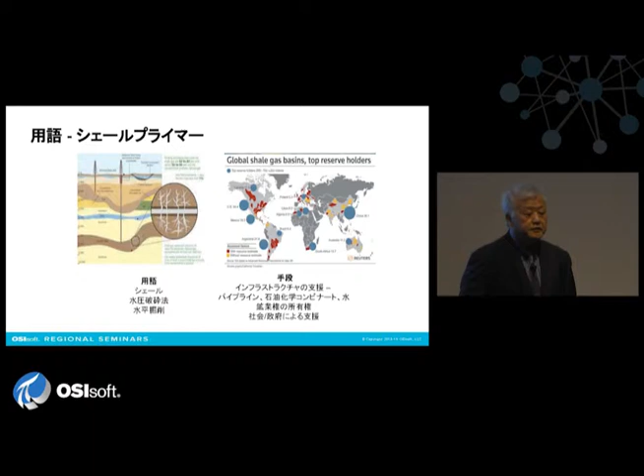But I wanted to give you what we call the enablers of why North America is different than all the other places you can get shale. The main drivers, what we call the enablers, are that we have the infrastructure, the pipelines, the petrochemical complex, and something that's not really thought about a lot: mineral rights, so that people in North Dakota, Texas, Kansas, they own the rights to sell to the oil and gas companies for them to drill, to allow them to build a pipeline. So that combination of factors gives North America, I think, a competitive advantage to be able to extract the natural gas out of the North America markets.

So this is kind of a summary slide. What's the impact to the shale production? I wanted to emphasize areas like Pennsylvania. For many years, Pennsylvania was thought to be dried out. No one was making any investments. And within 3 years of using fracking technology, they were able to exceed the North Sea gas production, going from zero to exceeding that part of the world.

What I thought may be a short-term supply, they're projecting to be over a 100-year supply. As I go across North America and I go to West Texas, I'm seeing massive capital investments because this is not a short-term trend. And the evidence that people are putting bets on that is the amount of money being invested. There's over $100 billion of investment going into facilities development.

What's the end result of all this? Just yesterday I looked up the Henry Hub, that's the spot market price for natural gas. You'll see that from the time I thought the chemical industry was dying, from 2000 to 2008, there's a steady decrease in the natural gas supply cost in North America, and it's around $4.50 right now. So what we're seeing here is a steady decrease in natural gas pricing.

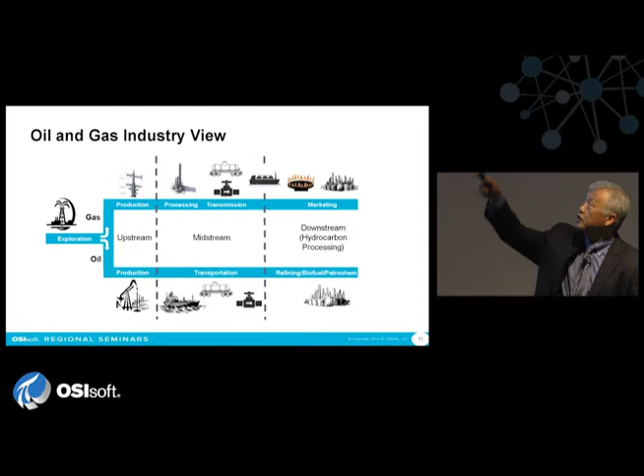So this is another view of the oil and gas industry, and I wanted to concentrate on the upper side of how the gas flows from production all the way to the market. And this is a little bit more of a detailed view here.

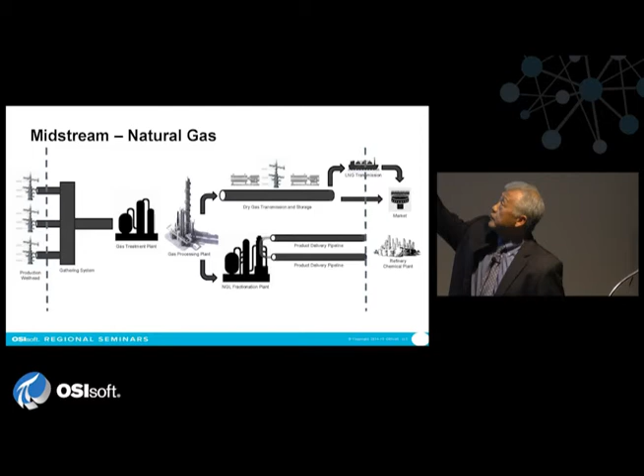Now, in East Asia here, what you'll see is that most of the investment that we're starting to see is in the transportation of LNG, the creation of the gas regasification terminals here in the East Asia market. And that's something you guys have evidenced and see over here.

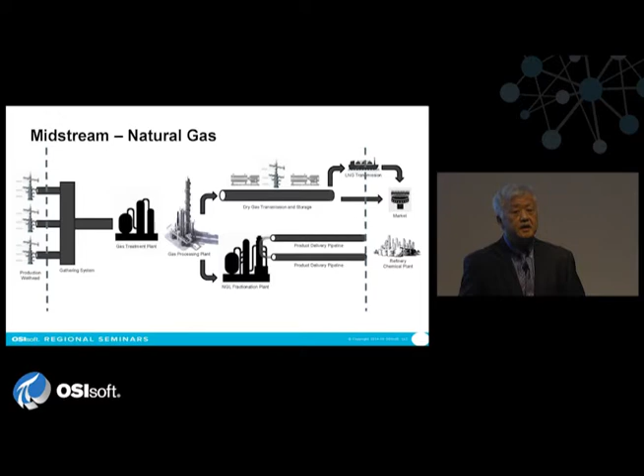So we're entering for the next several years, because the gas supply is so abundant, really a global trading market here to build the infrastructure for natural gas. That will continue here, and the pace is increasing.

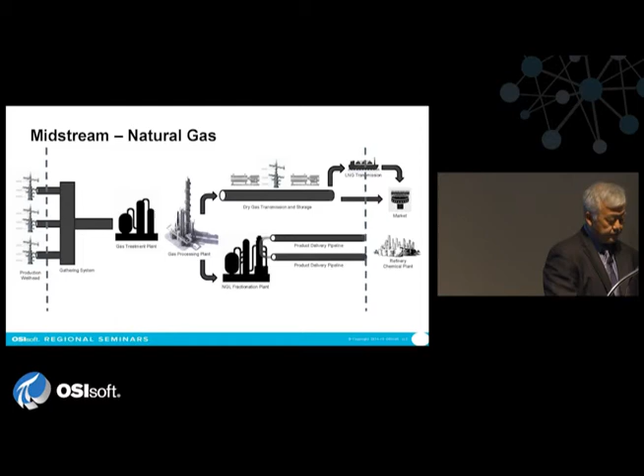So I wanted to now go to the petrochemical trends here. We talked about the industry challenges, and then I said I wanted to focus on the energy management and the mature markets and how companies are dealing with these mature markets. And the first one is a very common term in the refinery business called ASM, abnormal situation management. And just a little definition of what is abnormal situation management.

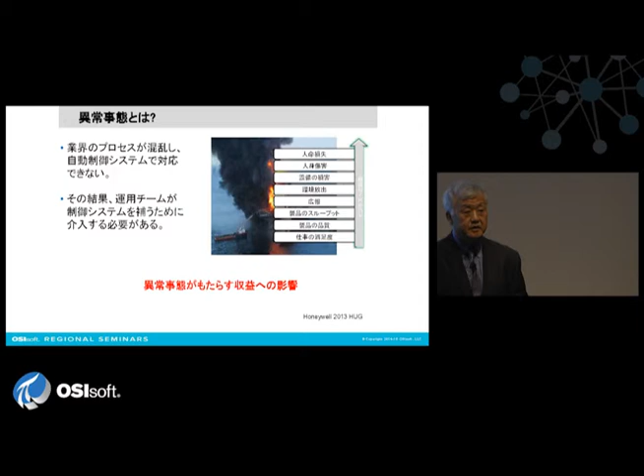It's something that you didn't take account of. It's not something that you developed in your control system model, and it occurred. You didn't know what's going to happen, but it happened, and it causes impact to your business. That's what an abnormal situation is. You didn't know it was going to happen. And it could cost you money.

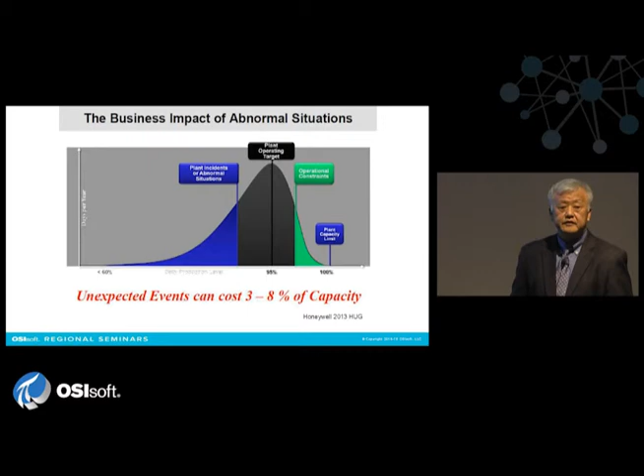So in the refinery studies from the Honeywell groups, it could be anywhere from 3 to 8% impact to your capacity, and you have to kind of define what is that incident, what does it mean to your business to lose 3 to 8% of your capacity.

The learning points about abnormal situation I want you to take away is that you have to design an abnormal situation framework for not only what is normal in your process, but what is abnormal. You have to basically look for adaptation because your process is always constantly changing. So you have to have a flexible system that you can quickly change your infrastructure controls and information as your process changes.

And one way of doing this situational awareness of an ASM solution is called operational excellence. That's where some of the companies that I worked for are looking at operational excellence to implement an ASM framework.

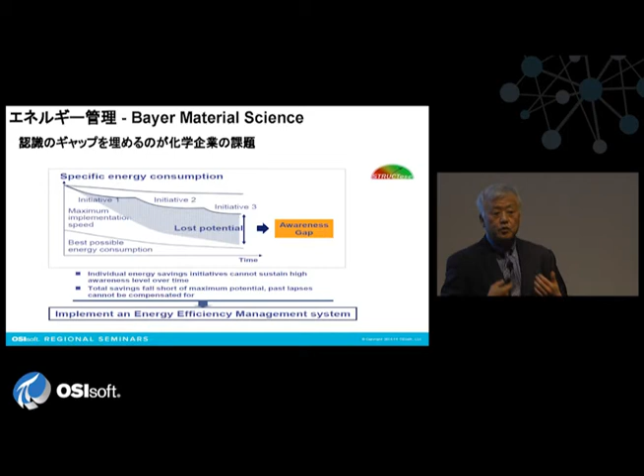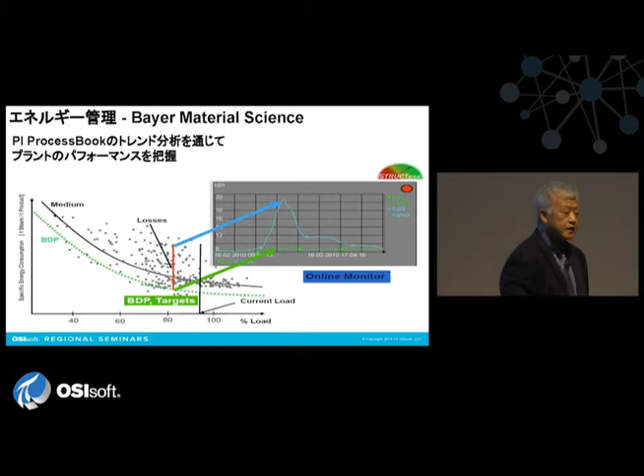So the first example is how we solved it without the new technology that was previously demoed. I worked with one of my clients, Bayer Material Science, and they had the exact same questions 6 years ago. They wanted to know, what is the awareness gap? They have a documented baseline of the best possible energy consumption. With the current projects, what is the gap? How much could we save? Using the older technology, by looking at ProcessBook and trends as in the previous demos, they calculated the error between the best operation line and what they're currently running. That's called the loss or their awareness gap. So they could see that through their trends.

A better way, what we proposed back in June to another company, is why don't we use our latest technology? We used most of the technology that was demoed before to solve this equation that Bayer did. And here's the results. This is back in June, July, very recent. This is the end result using Power Pivot of all the data that we collected from their plants in real time. And I tried to address all the business questions that I discussed earlier.

So the first question they wanted to know is, we have multiple parts of the plant. Pick one plant. So we do what we call the slicers. So if I drill into one part of the plant, in this case it's called Refinery, it then allows me to select a sub-part of the plant. They call it a unit. So by selecting the part of the area that I want to drill into, it tells me what units I

can actually select. Now, all these slicers, it might not be evident, is part of the AF model that was demoed. So I'm able to get all this information because I spent the time up front to model the plant. And all this ability to slice or analyze is now part of that AF model.

The next thing they want is they ask me questions about which motor do I want to analyze. So I had to bring in all the AF motor elements into my slicer. So I have a list of all the motors that I want to slice and dice and do the analysis.

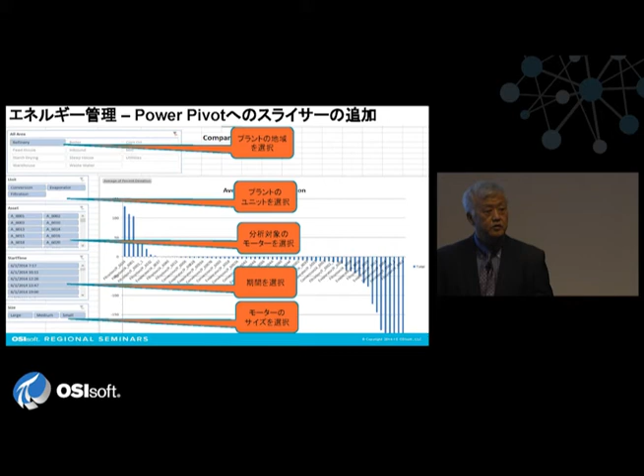In the real data, they have their motor size rating, so you'll have a lot more categories. But for this demo purposes, I just made 3 slices to make the point that you can select the size of the motor that you want to do the analysis, because the large motors are the biggest energy consumers, so you only want to spend time on the ones that's going to cost you the most money.

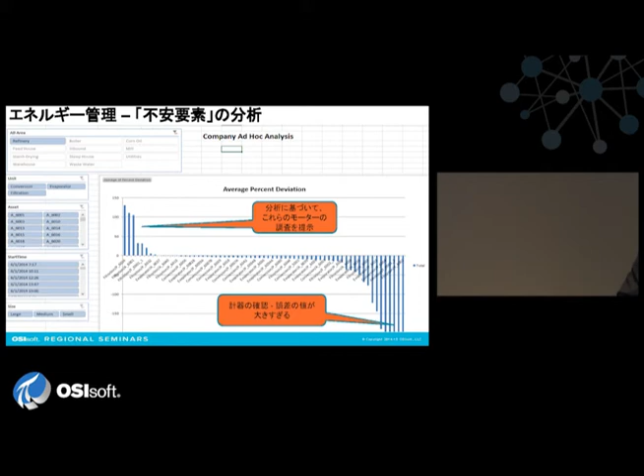And the result is this graph here. What we found out was that zero is baseline. If you're at 0, that means you're consuming the energy we expected you to consume. If you're above 0, you're consuming more than we expected you to consume. So what this analysis says is that those motors to the left are something you should investigate. Why are they using more energy than we expect?

The data on the right says this value is too large. There's something wrong. So the instrument engineers, you need to go back to these data points and check your instrumentation. It can't be that large.

So just by doing this analysis with real data at a facility, we can answer some of the questions of which motor should you be looking at? Which ones possibly have instrumentation problems? And this is all unfiltered data. So we were working with bad data, and whatever came in, we just basically said, this is what it looks like.

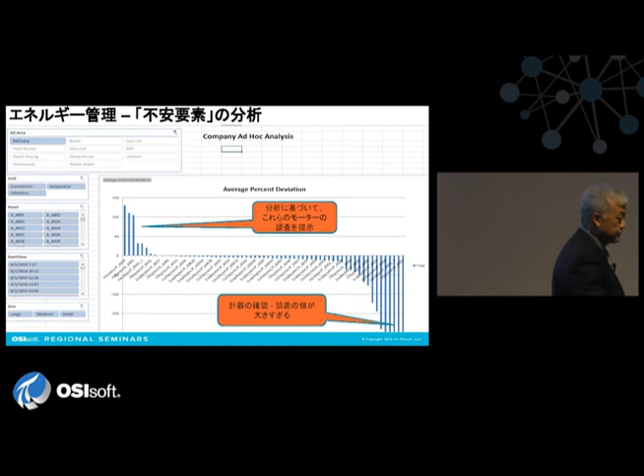The other question they asked was, we don't have time to do this ad hoc analysis. They said, Young, that's really nice, but I'm very busy. When I come in the morning, I just want to know one question. Give me the 10 motors that are the most energy consumers for all the areas in the plant. And we'll just call them bad actors. So the maintenance engineer said that's what he wanted.

So using DataLink, we just created this. It took just about 15 minutes to create this because I already had the model developed in AF. I had the events all modeled for me. I can ask just one question. I asked, give me the top 10 motors or high energy consumers for the last 7 days.

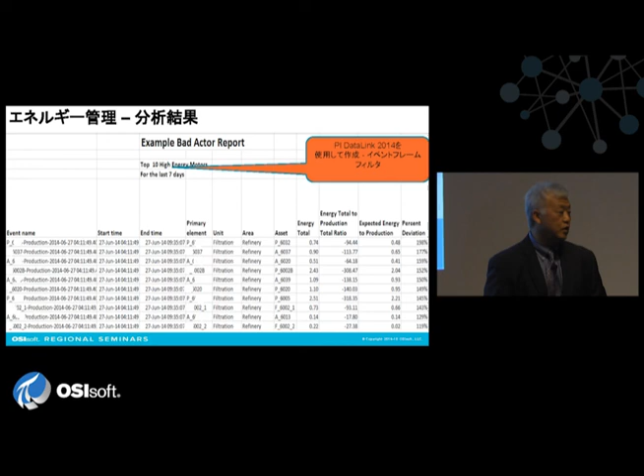And this is a list now. This is a report that the maintenance engineers will come up in the morning at 7 a.m. and work on this list, because that's what they wanted. But I guess the point of all this is we made the investment up front to model this, to ask these types of questions. This is just one example of the questions you can ask, because we have the data.